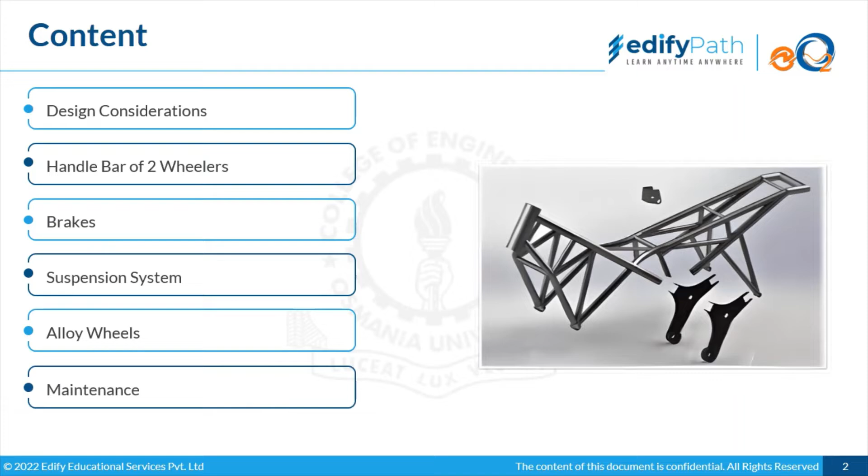So handlebar or a steering system when you talk about a four-wheeler - the shape and grip position of motorcycle handlebars plays a crucial role in defining your riding position on a motorcycle. The other day when we were looking into it, we saw that handlebars come in different shapes. Some handlebars are very close to you.

This in turn also defines the motorcycle's character in the way it turns around corners, the kind of effort required by the rider, and the comfort on offer. So the handlebar is directly proportional to how much it would turn, at what speed you can turn, whether you can take sharp turns or not, or turn at high speed.

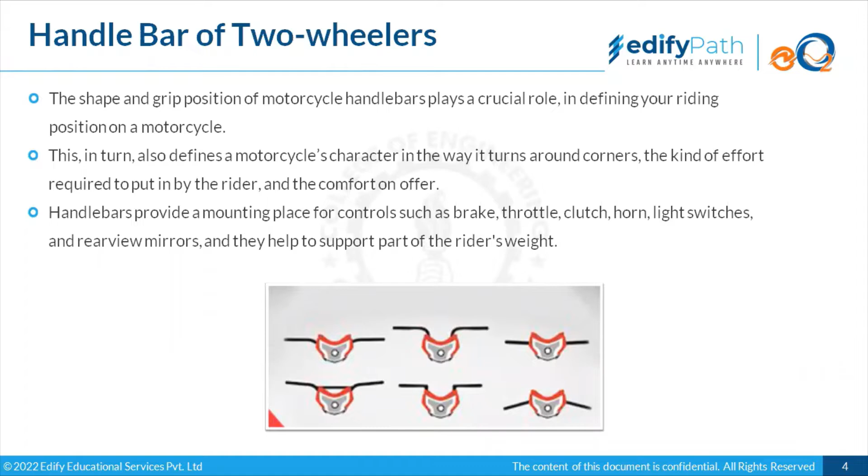So if you talk about a normal vehicle and an electrical vehicle, there is very little difference between the two, because all the utility switching, the display, and the switches for horn and everything are mounted on the handlebar only. So normally they are the same for a conventional bike and for any EV.

So issues related to handlebar include throttle failure, nut loosening due to uneven roads, high handlebar, speed accidents, and less rigid material. At what points or in what conditions could these issues develop for a handlebar? The throttle or accelerator is attached on, or forms a part of, the handlebar itself. There could be an issue or failure, or some wiring that goes from the handlebar to different switches or to the controller that might break, causing throttle failure.

The first analog signal that we give to any bike, whether conventional or electrical, is done through the throttle. When you feel you want to increase your speed, you give an analog signal by twisting your throttle, and that signal is processed in various ways, either increasing the fuel injection opening in a normal IC engine, or increasing the voltage in case of a motor in an EV. So if the throttle fails, you won't be able to move your vehicle, whether IC or electrical. It's the first point of analog signal you give the bike to start it moving.

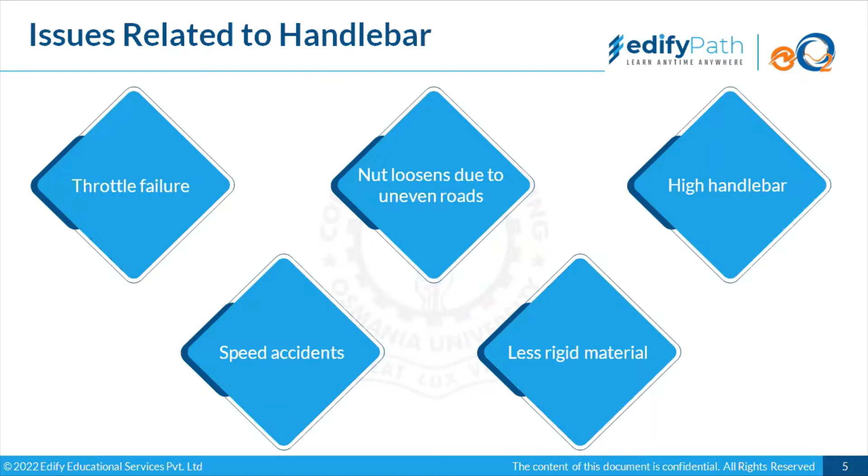Less rigid material: normally you would see that steel handlebars are mostly used, and they are properly rust free. In case of bikes, you normally don't experience rust in the handlebar, since they use proper material. If proper material is not used, they might either break due to rusting, or if exposed to certain shocks, even low intensity shocks, they could break.

So we have discussed the handlebar. Apart from the energy, the engine or the battery, and the motor, and the controller, the most important part in a vehicle is the braking. If there is no proper braking in the vehicle, it is useless to drive it, as everyone knows. All this put together, but with no brakes, the vehicle is useless. So the braking system is equally important.

So the braking system is equally important for a good vehicle. The common principle on which a braking system depends when stopping a vehicle is friction and heat. So how, it's simple. When you want to slow down your vehicle when it is moving at a speed, then you apply brakes.

And the application varies, scenario specific. It might be that you see a red light, say 100 or 200 meters in front of you, and you have to break the speed slowly so that you can reach slowly and there is no traffic. So that's one condition.

Then secondly, in abrupt braking, you are riding at a speed and suddenly a dog or some person crosses the road, and in impulsive braking you react and apply your brakes. So that is one kind of braking. Your vehicle should be designed in such a way that it could take it. The braking is conditional basis. It's not that it would react in only one particular way when you apply a brake.

So now we will be discussing more on the types of brakes. First is the hydraulic disc brakes. We start with the disc brake. You normally see that in two-wheelers it is well marketed that this bike comes with hydraulic brakes. Some would say it has a rear hydraulic brake, some would say both rear and front are hydraulic brakes, and some would say only the front wheel has a hydraulic brake.

So what normally happens in hydraulic brakes? The braking system, the brakes in your hand or applied through your foot - when you apply the brake, with the help of oil filled in a pipe, there is a wheel with a disc attached to it, and a disc caliper. You can see this green structure, that is called the caliper. That is mounted such that it holds but doesn't touch the disc, and the disc is in between the calipers.

In blue you can see the brake pads. The red thing you can see is the piston. And the actual wheel hub you can see. So the disc is attached to the wheel.

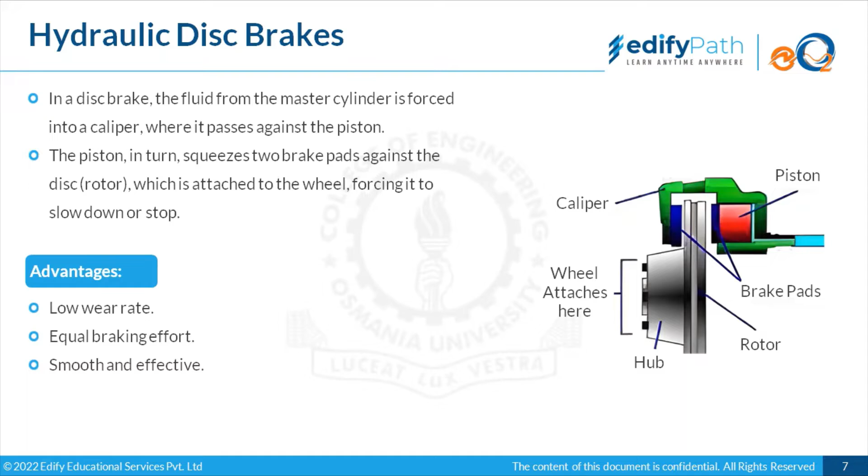So what are the advantages? Low wear rate, equal braking effort, and smooth and effective operation. This is more smooth and effective than normal drum brakes, bringing the vehicle to a halt in much lower reaction time than normal drum brakes, which we will discuss in the next slide.

The spring is a component that generates force proportional to its displacement. A coil spring is made of a resilient steel rod. It extends as the wheel moves down and compresses as the wheel moves up, so the car body remains reasonably level.

The main function of the spring is normally that when we are applying a force, it transfers the force. When we are applying force from one end, it transfers to the next end, but that would be relatively done within a time frame. The reaction would not be instant on the other end.

The dampers generate force proportional to the rate of change of displacement. Dampers, commonly called shock absorbers, perform this function. A damper has a piston that moves inside a sealed oil-filled cylinder with the up and down movement of the wheel. These are like the shockers that we call. In shockers, oil is filled, and normally spring is there along with the oil. That takes care of the damping. So this forms part of the suspension system.

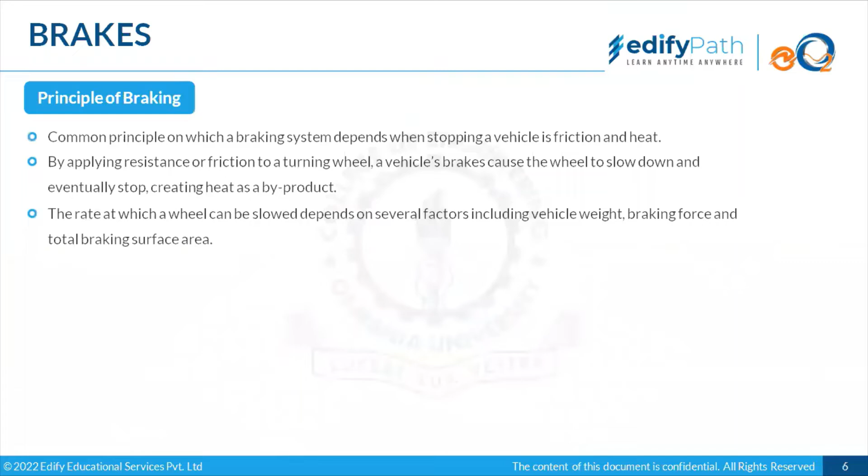So, a bit of disturbance in between. These springs and dampers that we are talking about are part of the suspension system of any vehicle. There are different suspension systems like rear and front suspension. In case of bikes, there is a fork-like structure for the front suspension.

We all know the dampers or the shockers that we call about. Normally they are shock absorbers, and in common language we call them shockers. They are like a telescopic structure, where one portion goes into another when there are vibrations or when the road condition is bad. When you are driving through a bad road, they take care of the major dampening of the shocks that would be experienced while riding.

The damper generates force proportional to the rate of change of displacement. Dampers, commonly called shock absorbers, perform this function. A damper has a piston that moves inside a sealed oil-filled cylinder with the up and down movement of the wheel. There is oil and a piston, and there is always a gap. When there are a lot of vibrations, this would keep moving up and down to take care of the vibration.

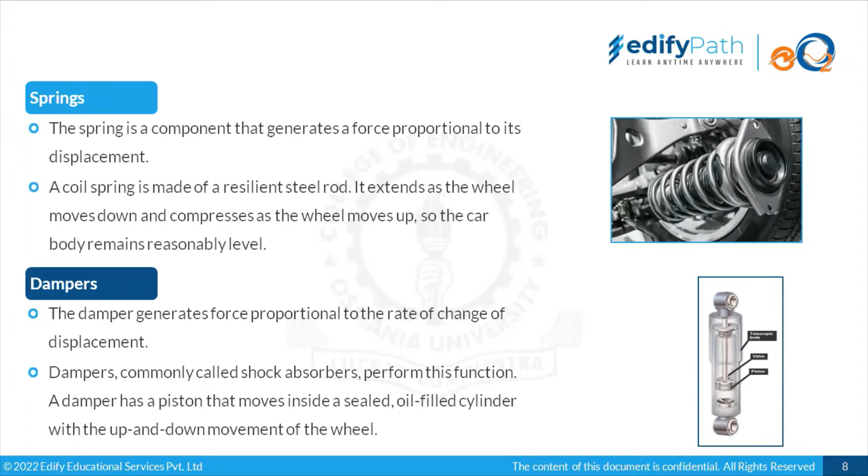They normally don't use springs for suspension in that trolley. When you travel in it, you will experience what it's like riding on a bad road with no suspension system. So how important the suspension system is - when you sit on the trolley in a tractor and ride, only then will you be able to visualize how important the suspension system is for any vehicle.

Let's talk about the wheel system. We spoke about different components, but at the same time, the wheel - we said how important the braking system is for safety, but at the same time the wheel is also equally important.

In modern vehicles, we are finding these alloy wheels happening. Before this, in bikes, you were getting spokes. In cycles, you still get spokes only, but in the new latest models of bikes also, you are not getting spokes, you are getting alloy wheels. The biggest advantage of alloy is, first of all, they are very light.

Since alloy is used, it's a composition of different metals or elements, so it definitely gives robustness to your rim.

At the end of the day, if you talk about a wheel, what forms a wheel? A rim over which a rubber tire is mounted, and the tire could either be a tube tire or a tubeless tire. So normally, even in modern tires, tubeless tires are very much popular in modern vehicles.

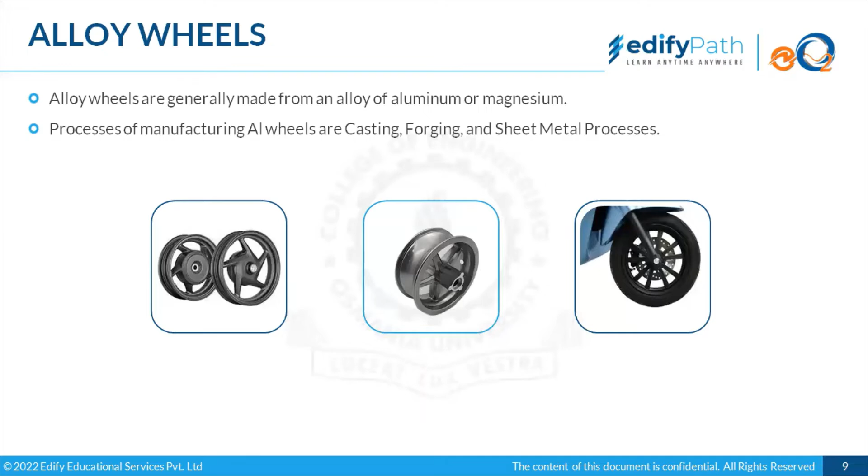Key benefits of alloy wheels: lightweight, very much suited to racing, provide a smart makeover, provide a fantastic road grip, a bit costly, but their value offsets the cost.

Alloy wheels are definitely lighter in weight, so in any case they are best suited to electrical vehicles, because we are looking for robustness with lesser weight. Alloy wheels suit electrical vehicles very well and are very much suited to racing, even where you want to develop high speeds, and when you want to accelerate in a very short time frame.

You'll see vehicles that claim to go 0 to 60 kilometers in 5 seconds. For that, the two major components are either a very strong engine or motor, or equivalently reduced weight of the vehicle. Both play a very important role when you want to accelerate fast.

Alloy wheels provide a smart makeover, definitely improving the aesthetics of the vehicle. If you use spoke tires in a bike versus alloy wheels, the alloy wheels improve the look and structure of your vehicle.

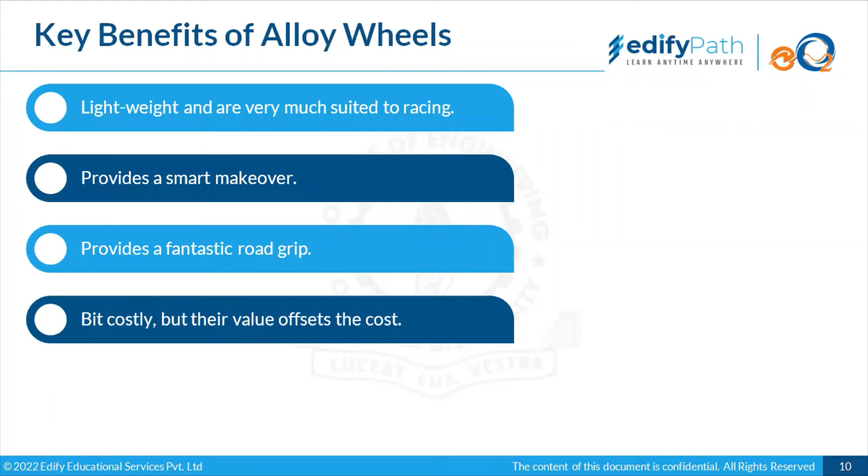Alloy wheels are a bit costly, but their value offsets the cost. The advantages they bring to the vehicle are far higher than the extra amount spent on the tires. As we discussed, modern vehicles, leaving out very few models, are now coming up with alloy wheels only.

Now about maintenance: we are more concentrated and focused on the maintenance of an electrical vehicle versus a normal conventional vehicle. In an EV, the additional items are the motor, the controller, and the battery pack, beyond all the major components we have in a normal bike.

We have to be very careful about where we place the motor. The chassis will have a provision for placement of the motor, depending on whether we select a mid-drive or a hub motor. It will fit directly into the chassis, but we'll have some kind of annexure through which the motor is fitted.

The same applies to the battery. Wherever you place the battery, you have to ensure it maintains the center of gravity of the vehicle, and at the same time it is not exposed to direct sunlight or direct water getting into the battery.

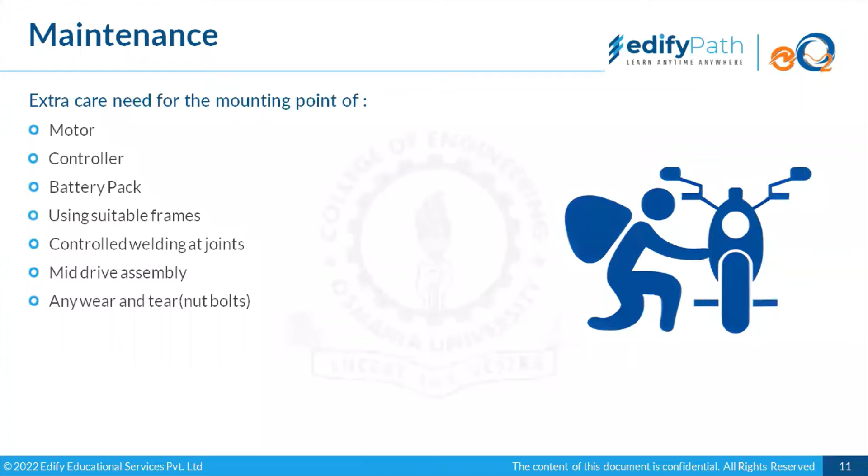So this was, today, whatever additional components that we were supposed to discuss, other than the frames that we discussed in the last session. These were the additional components that we would be attaching to the frame so that the vehicle gets to the desired format.

So till now, if we talk about the designing phase, we have been successful in discussing how we would be developing a very robust and good frame or chassis, and secondly, the additional components and how we would be attaching them to the chassis. So these are the two sessions we took, concentrating mostly on the iron or metal parts of a vehicle. We have not touched upon the critical or primary components of the vehicle, but these metal parts are very important at times.

Maybe because they are not exposed and can't be seen through your naked eye, and their performance can't be judged through any parameters. You know about battery, motor, and controller, but these are parts which can only be analyzed when you properly monitor them from time to time. In these two sessions we were trying to stress upon how important these parts are.